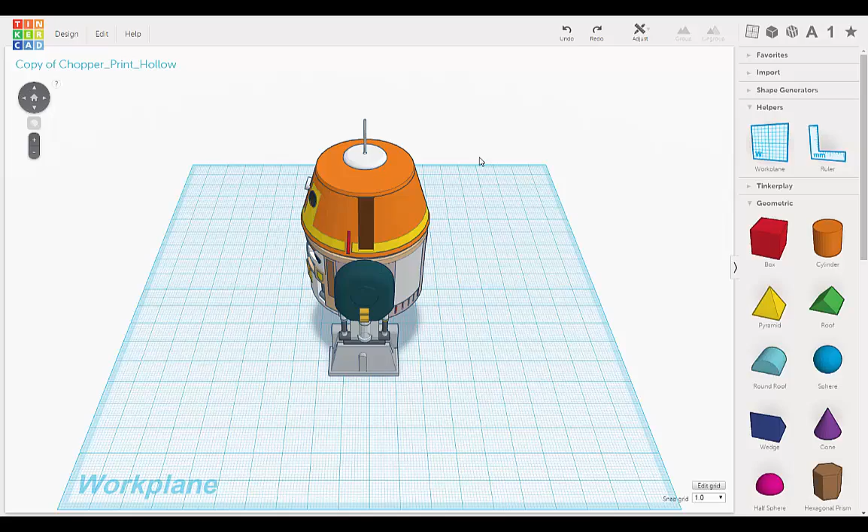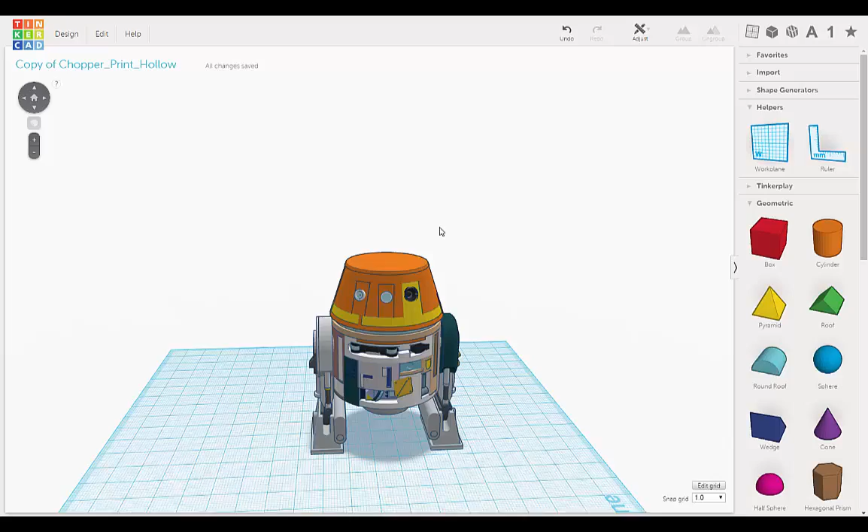First thing I'm going to do is remove this, because sandstone printing will not be able to tolerate something as skinny as this top part, this antenna. So I'm going to delete it. I have it saved in another file, and we'll only print this out. The sandstone wouldn't print that, it would automatically fail. So I'm just going to save that out without it, and maybe eventually when the colored plastics come through, we'll try it with that.

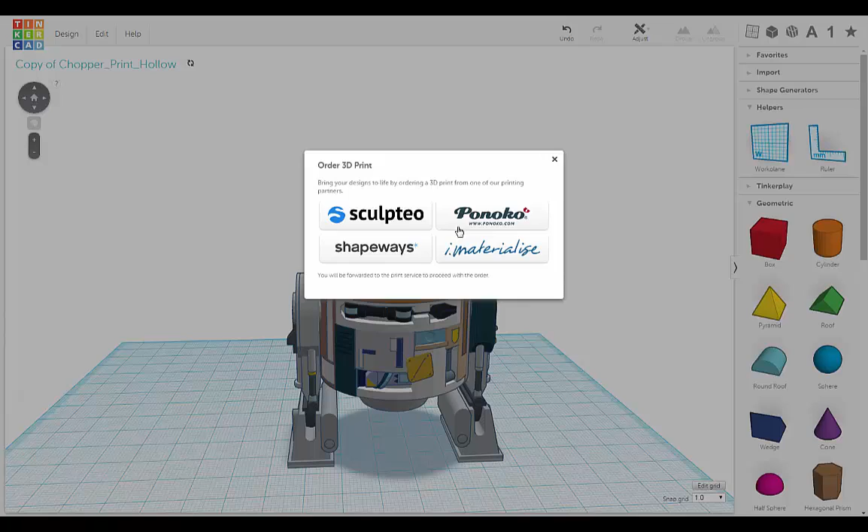So now that I have this ready, I'm going to go to Design and order 3D print. We're going to go to Shapeways, and I'm going to print in color. Continue printing, and it'll open up in Shapeways. And there it is, that came over really fast.

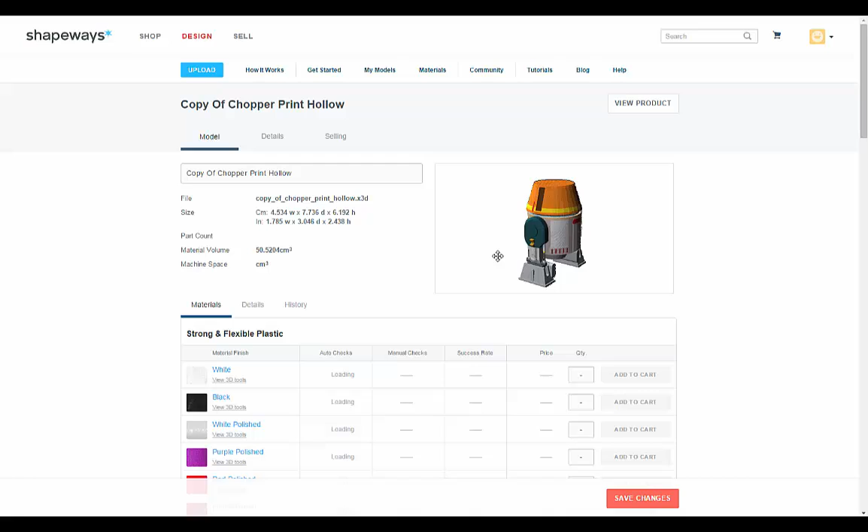Looks great in the preview. Now we just have to wait for it to do the auto checks.

So it looks like it's just a little shy of... it's about 2 inches wide on the side, about 3 inches high, and about 2.5 inches wide in the front. That's pretty good size, it could be bigger, but we're trying to keep our costs down.

So let's see what it comes up with. Okay, so we have issues. Let's scroll down to full color sandstone and let's see what the problems are.

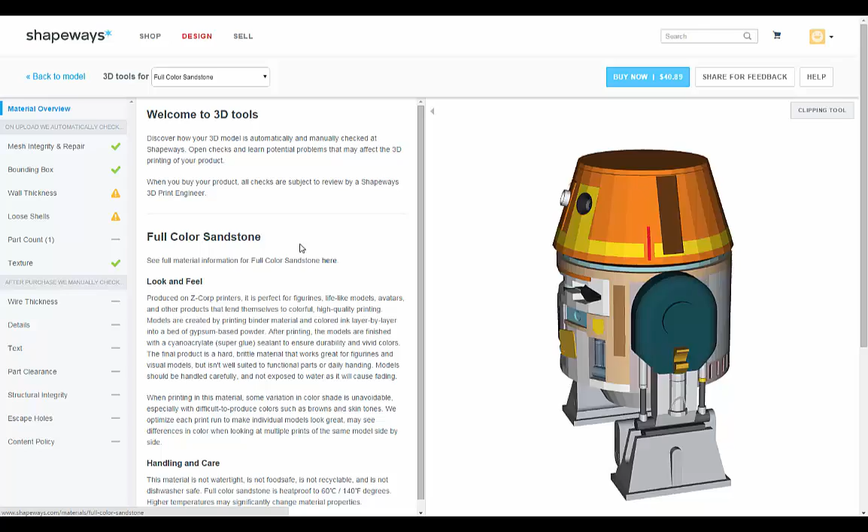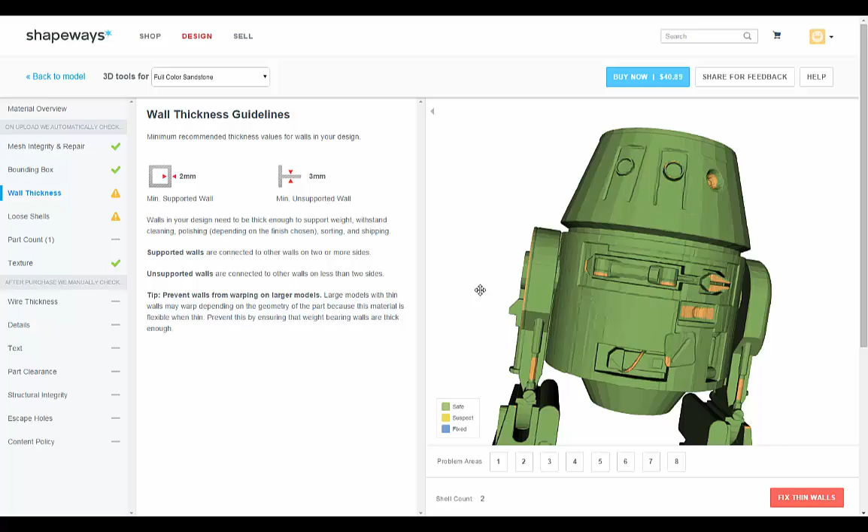Okay, so wall thickness, I was expecting that, and loose shells. Let's click on wall thickness. And if you look at the legend down here in the corner, green means safe, yellow means suspect, and blue means fixed. We're not going to fix anything in here, but it numbers them so you can click on it and it'll take you to it.

But we can kind of see. So this little panel here on his shoulder is probably a little too thin. This panel on the side here is just too thin. It's a little too thin up here, and this panel's a little thin.

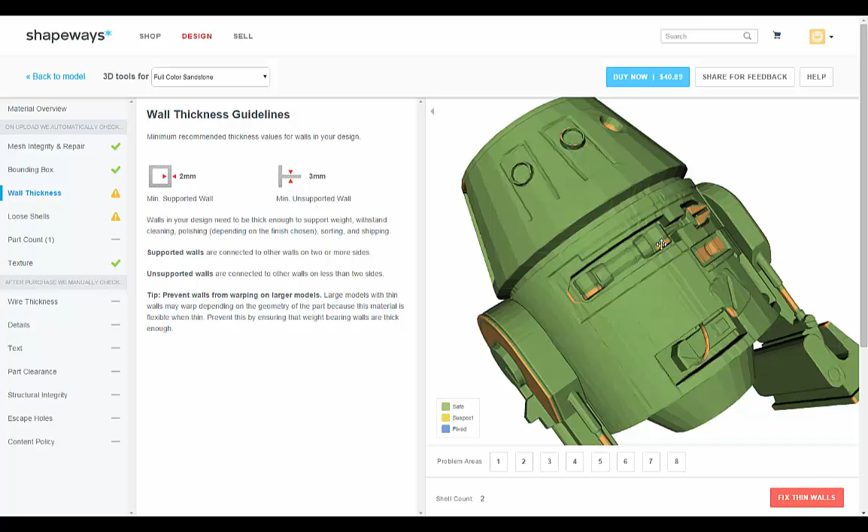This one I was expecting right here, this part's just a little too thin. The wire's just a little too thin. This part here is a little thin. This is a little thin, and then these here, the struts.

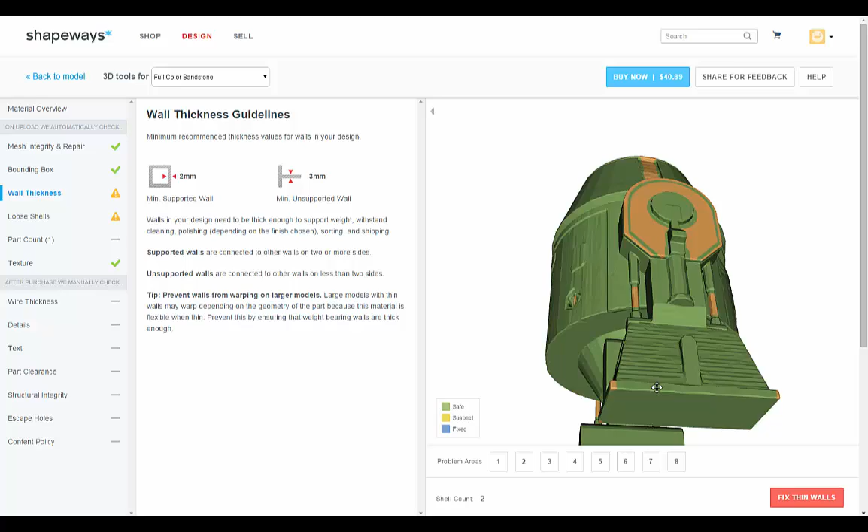So it has issue with this part right here, which is not bad. These are actually not too bad, these are all pretty doable. The corners here is kind of weird. I almost wonder if we just thicken this up a little bit, would that take care of that?

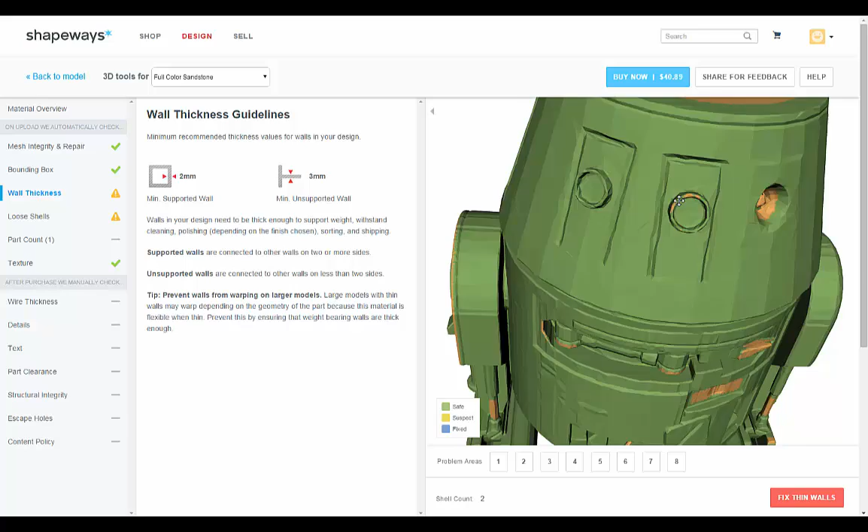But that's all pretty doable. This part I'm not sure why it's doing that, but we can figure something out there. Actually, these came out pretty good too, I was expecting this to have an issue. We might be able to thicken those very easily. In general, this is all relatively simple stuff, relatively easy to fix. So, not bad.

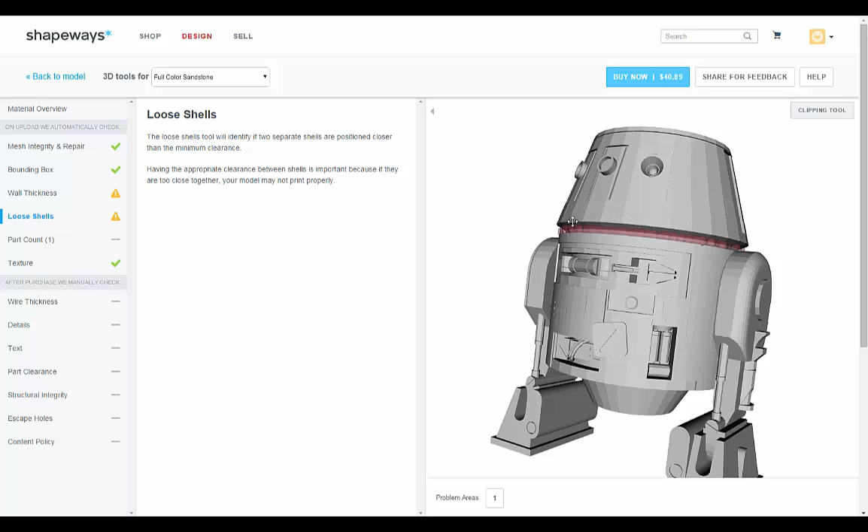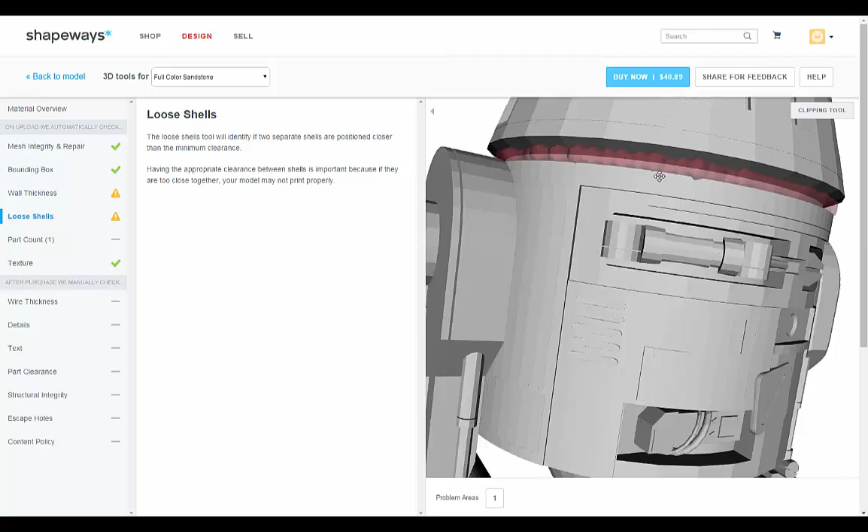So let's check out the loose shells. So this one, yeah, it's thinking this is two separate pieces, and I'm not sure why it's doing that, but we might be able to fix it if we take the head and move it down a little bit. It might be that there's too much of a space in there, so we can give that a shot.

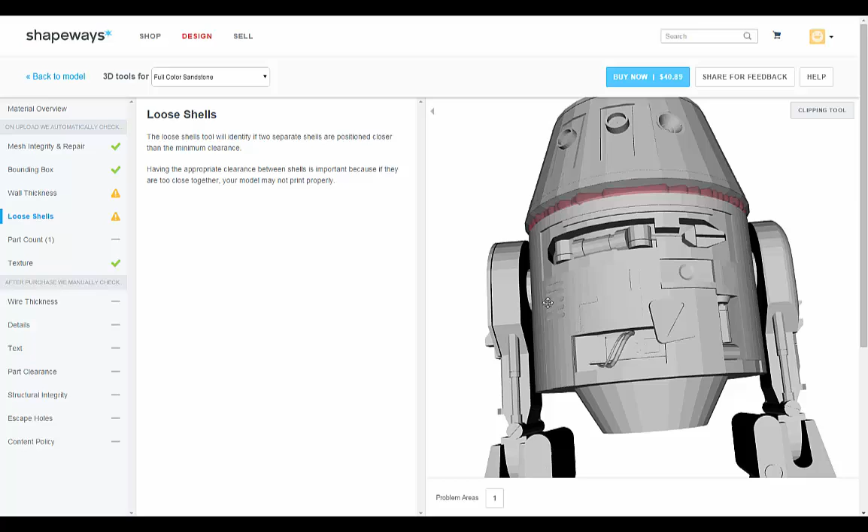Yeah, so let's try that. But overall, it's not too bad, this all looks like nothing major. So we can remember which has what issues, let's keep this up here, and we'll go back to the model, and we'll click out of that.

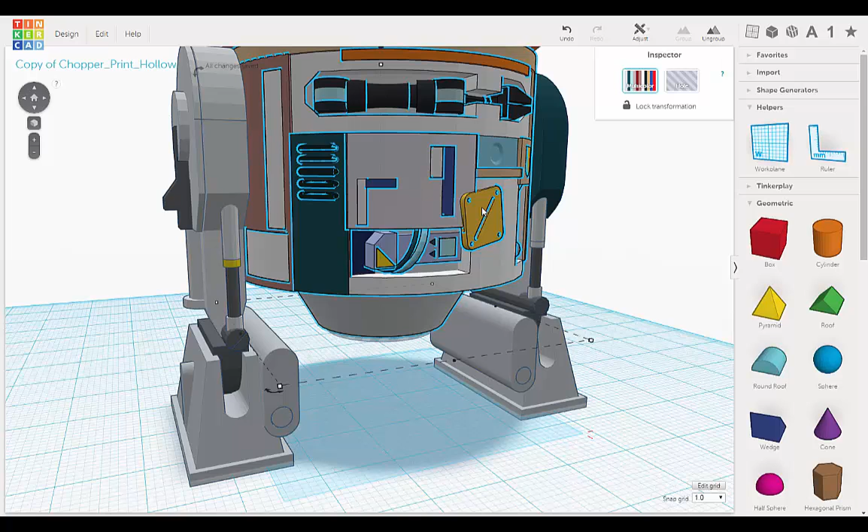So let's hit the simple stuff first. So this one here, first we have to ungroup. So it can figure itself out. Oh, we have to ungroup again. Okay, wow, and ungroup again.

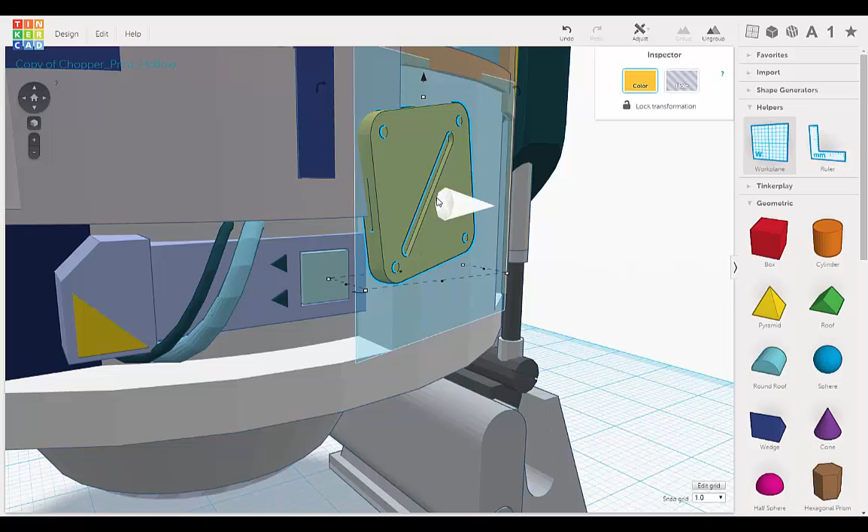There we go. Alright, this one should be just a matter of making it thicker. So here's a little trick: you grab the workplane tool, and we put it right there. We select this, and it moves this little button here onto the top, and we can just pull that out. It's probably too much, so let's take this to 0.25.

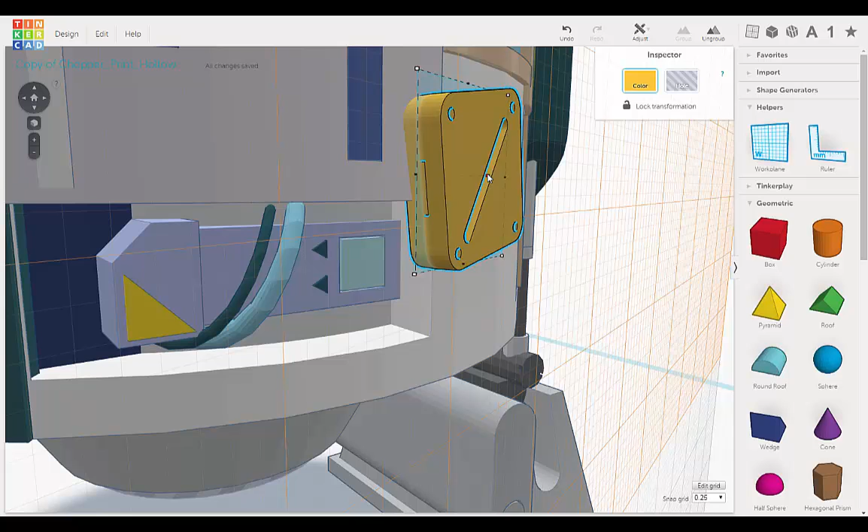Oh, that's really thick. Let's try and just put it back a little bit, and then what we can do is we can thicken this side by getting underneath it.

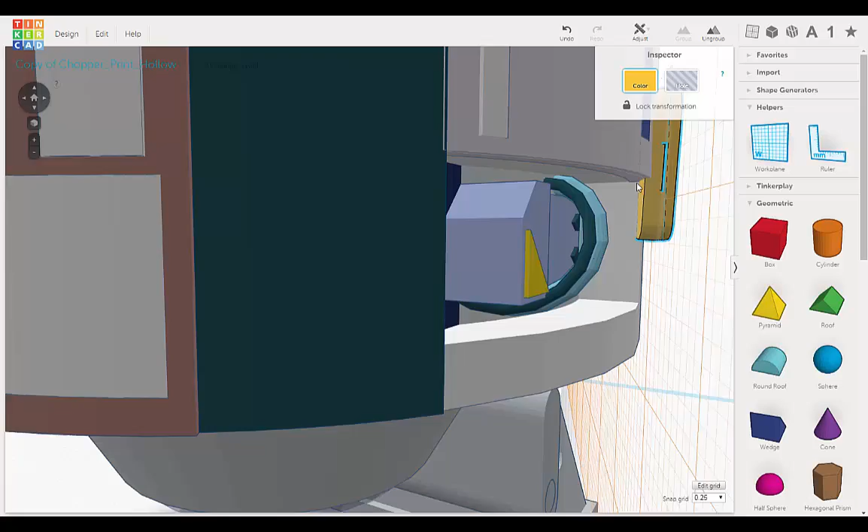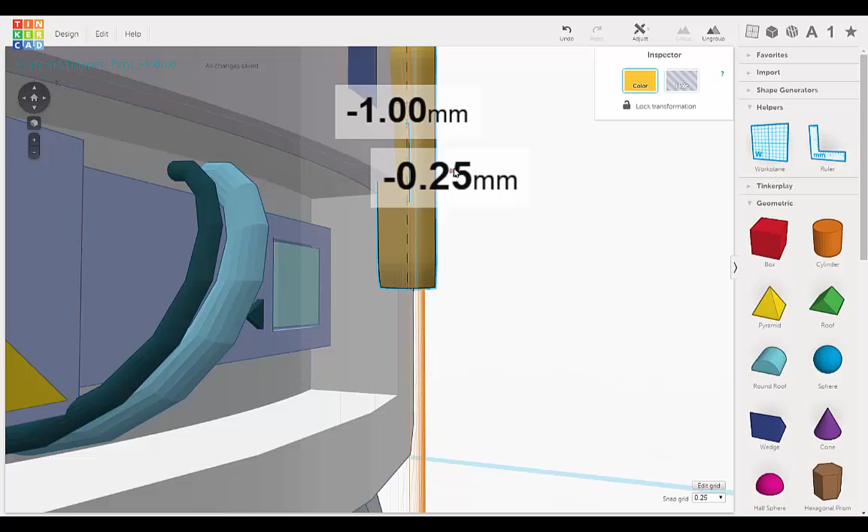Actually, I'll do it this way. Pull this out again, and then let's grab it and just push it down. There we go. And let's just do it a little more. There, that should solve that problem.

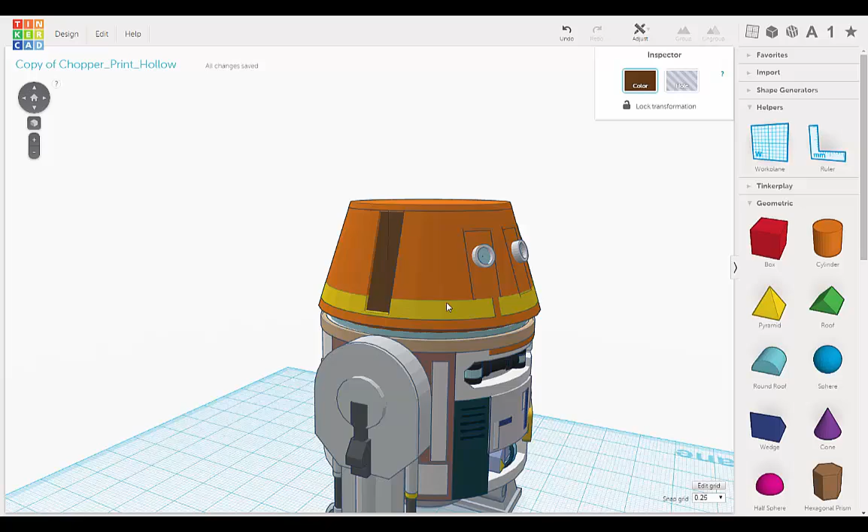Okay, now move the work plane back to normal. All right, these panels here, let's do the same thing. So let's move that there. Okay.

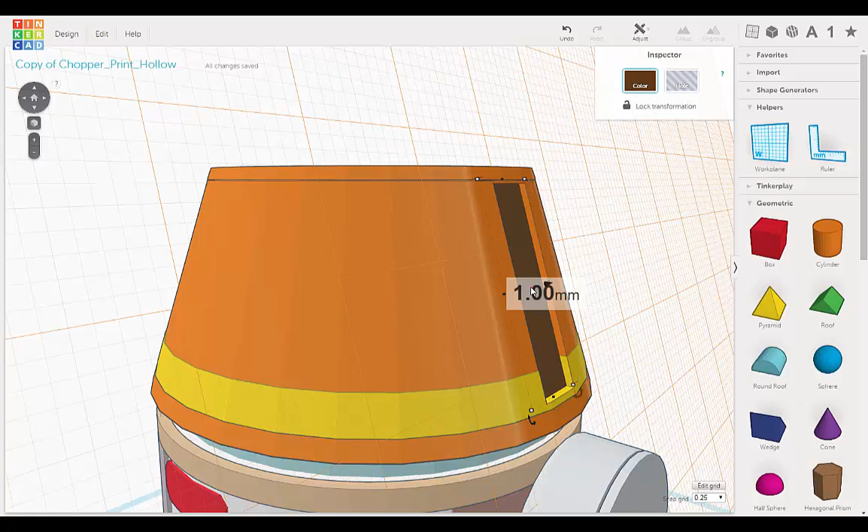Select it, and let's pull this out, and then push it back in. There, so that made that 1 millimeter thick. That should be good enough for that.

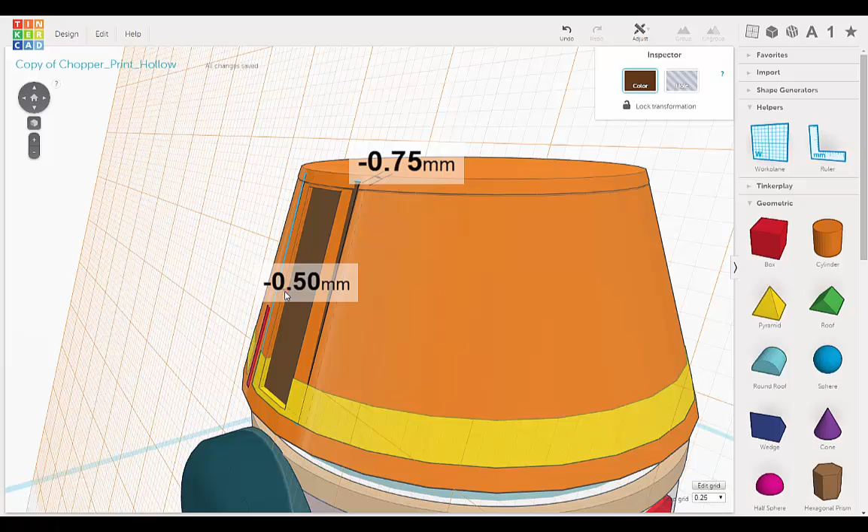We'll do the same with this one. And let's move the work plane over there. Yeah, it's only 0.25, that's way too thin. So it's 1. There we go. Does that match up with that? Yep, great.

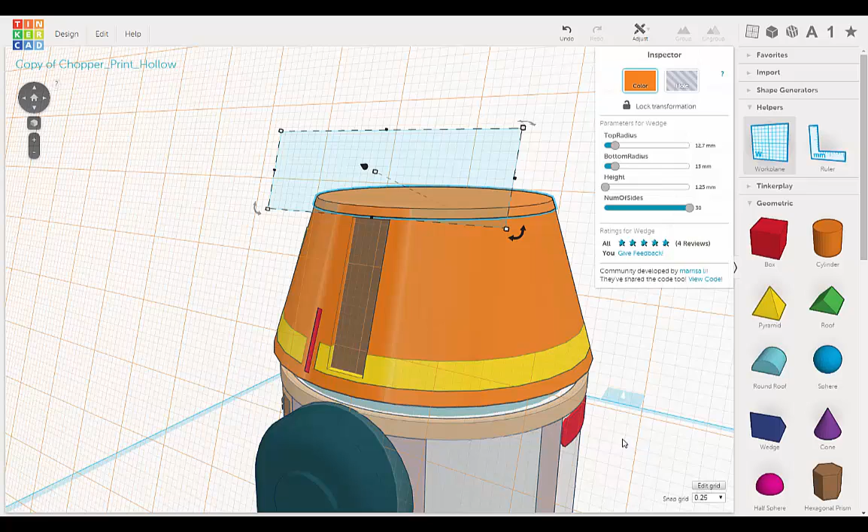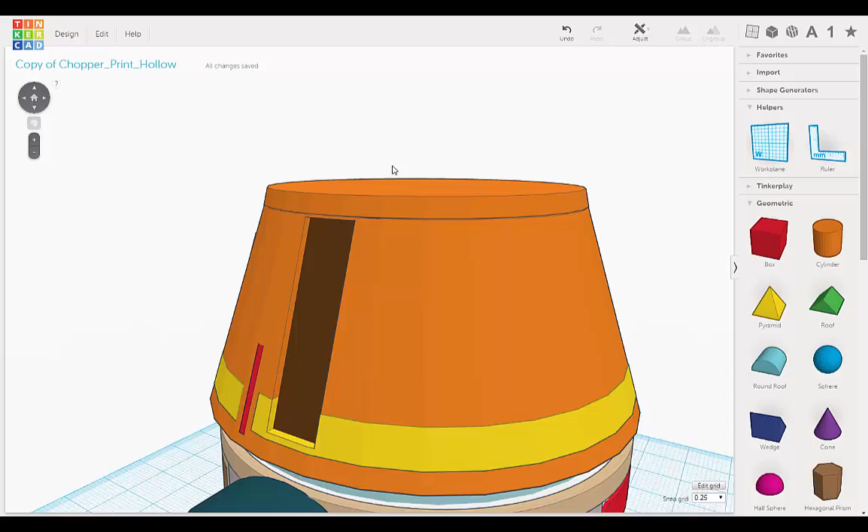Okay, and then let's try this piece here. Let's move the work plane back down to the bottom. All right, this piece is 1.25, so let's just move that. Oops. There we go. All right.

Unfortunately, sometimes that's what you have to do when you're going to make something physically, is you have to make some slight little changes. So, all right, now we'll thicken this piece as well.

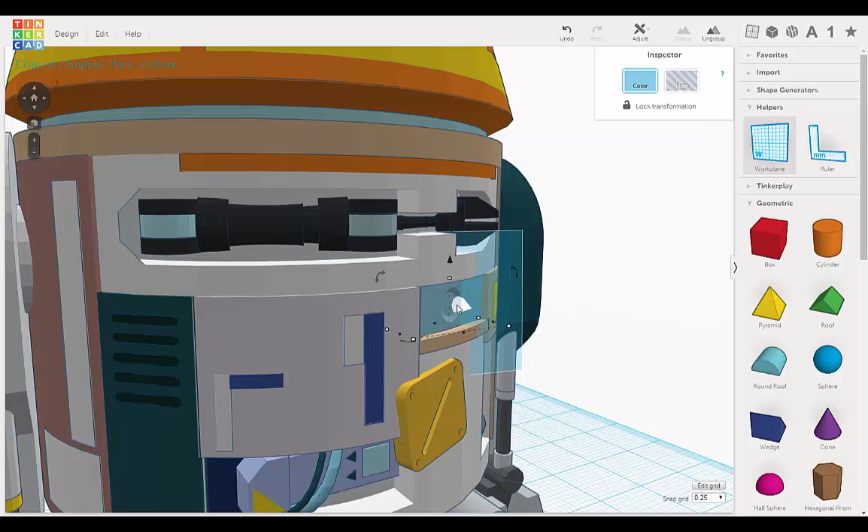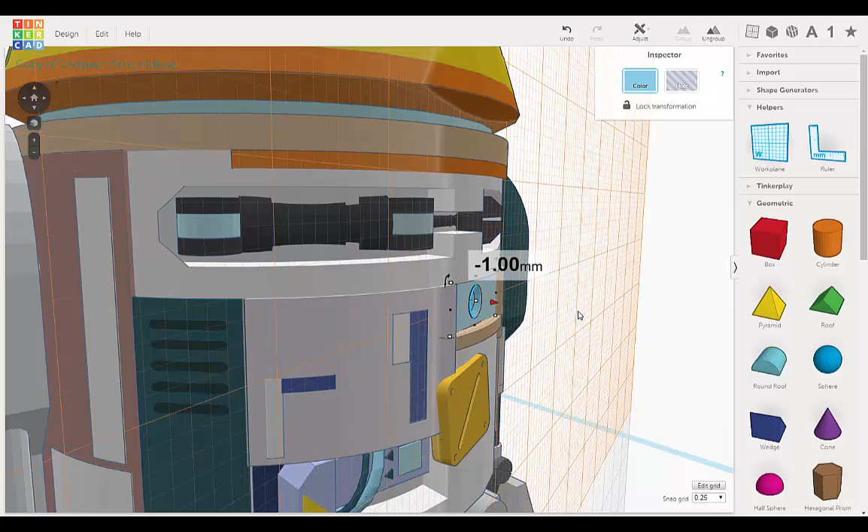Let's drag the work plane over. That didn't go the way I wanted it. Let's do it again. There we go, we select that panel, make it 1 millimeter, and then let's just push it back in. Select it just to double check. Okay, 1 millimeter.

All right, that worked. And then let's move this back and let's select this piece. Now, the nice thing about this, we have these controls here. So let's make them 3.

And 3. All right. Do the same with this one, 3 and 3.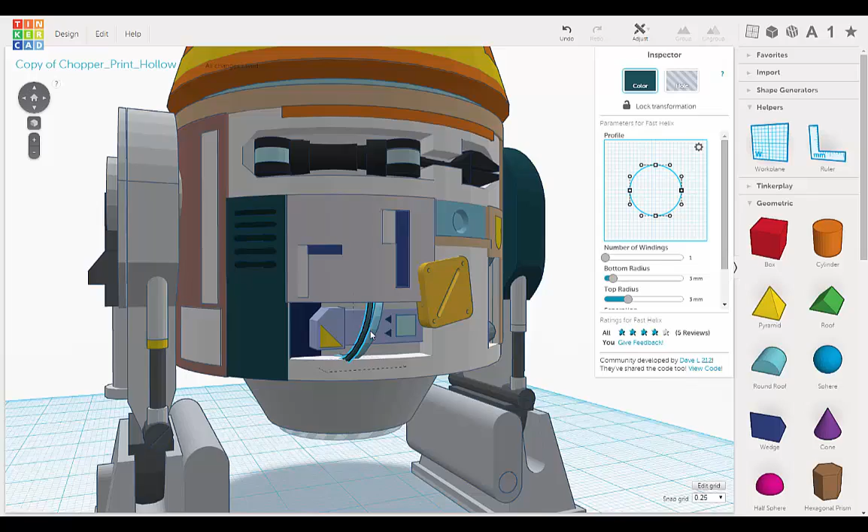And we just have to make some adjustments here. So we'll just pull this up, and then we'll just slide it in.

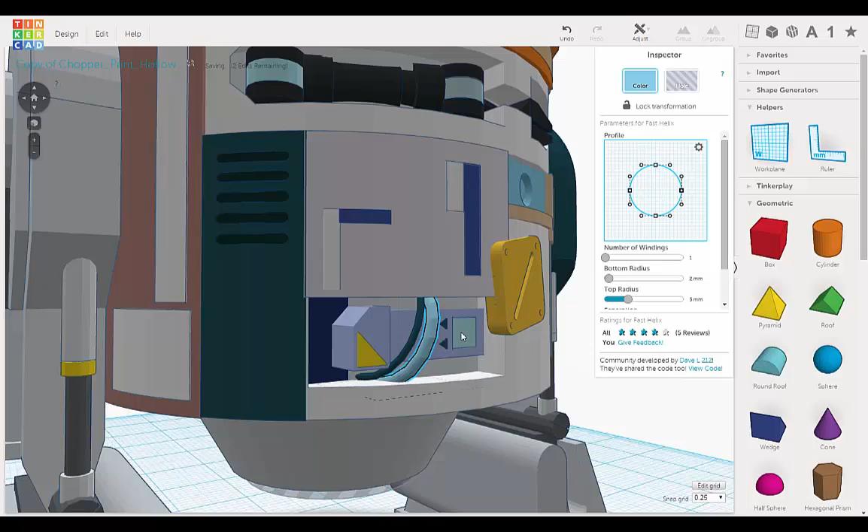That works, now I'll do the same with this one. Slide it in. And we'll just move it a little bit up. There we go, I'll slide in just a little more. I'll do the same with the other one. It just gives it more support.

Okay, oh, that still seems skinny though. It's 3 and 3. So this one, 2 and 3. Let's do 3 again.

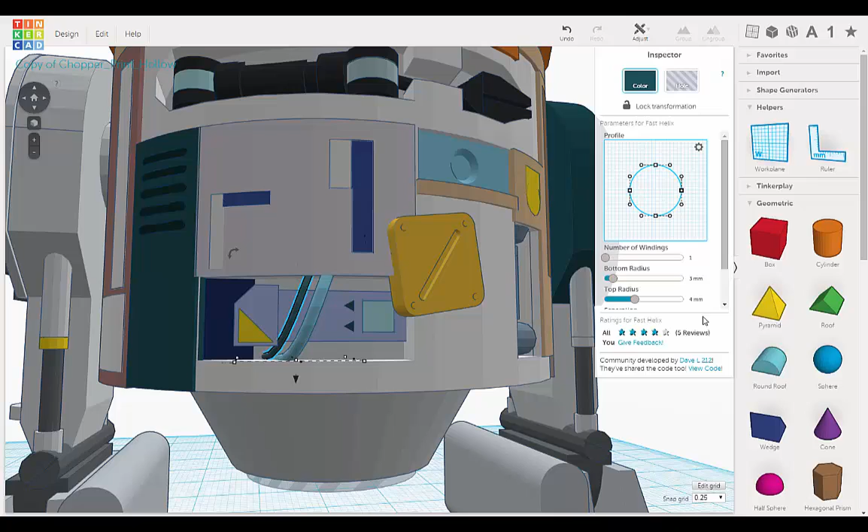Huh, I'm gonna make this one thicker. Let's go to 4. Whoa. Does not like them to be the same. Oh, maybe I need to make it smaller.

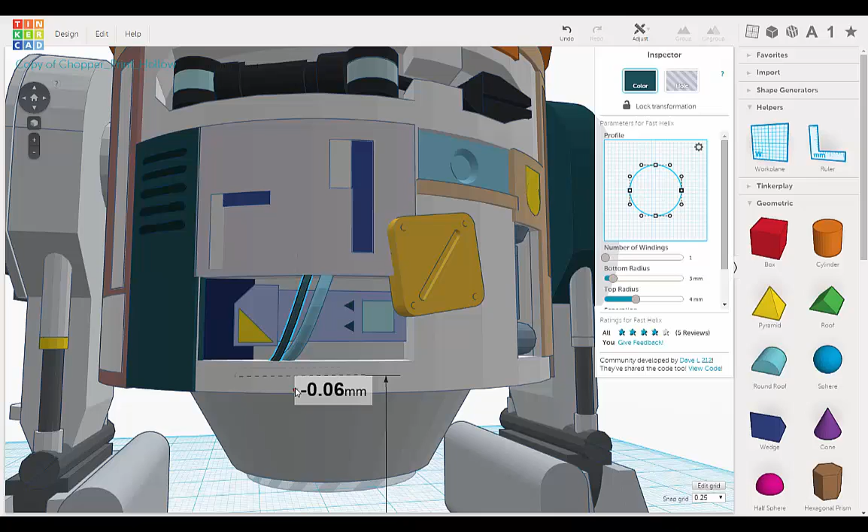Let's try 2. Huh. Okay. I'm moving them closer too, so they'll kind of support each other.

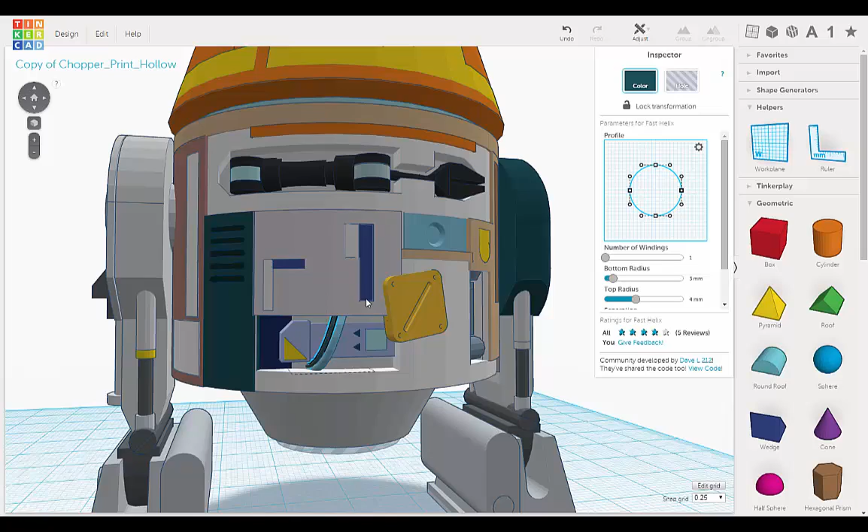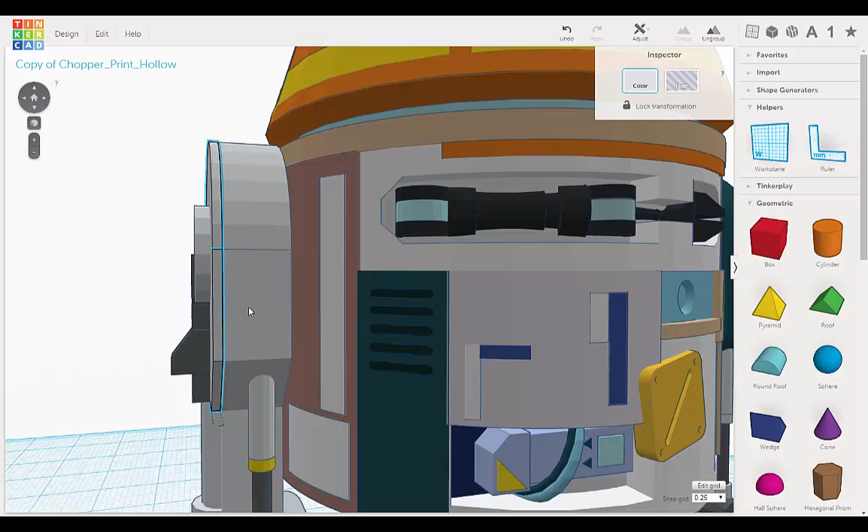Okay, now this piece here needs to be thicker, so we're going to ungroup that. And select that piece. And let's pull that out. Okay, that's better, that should work.

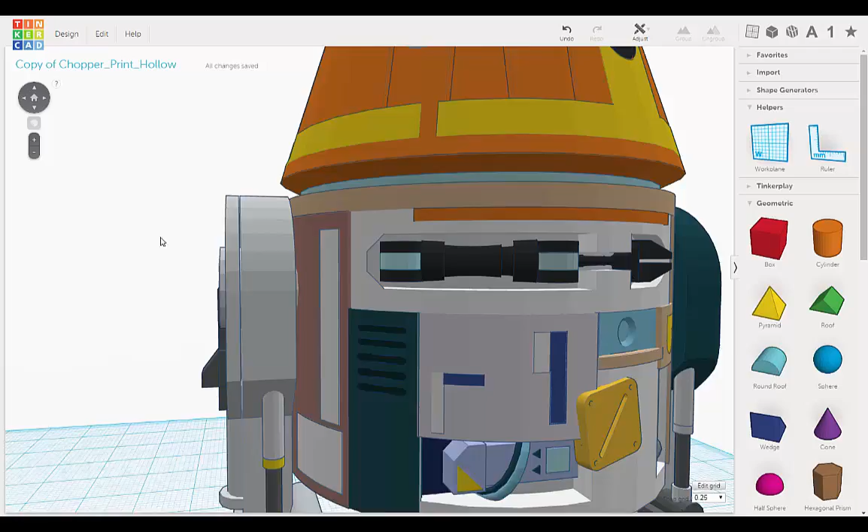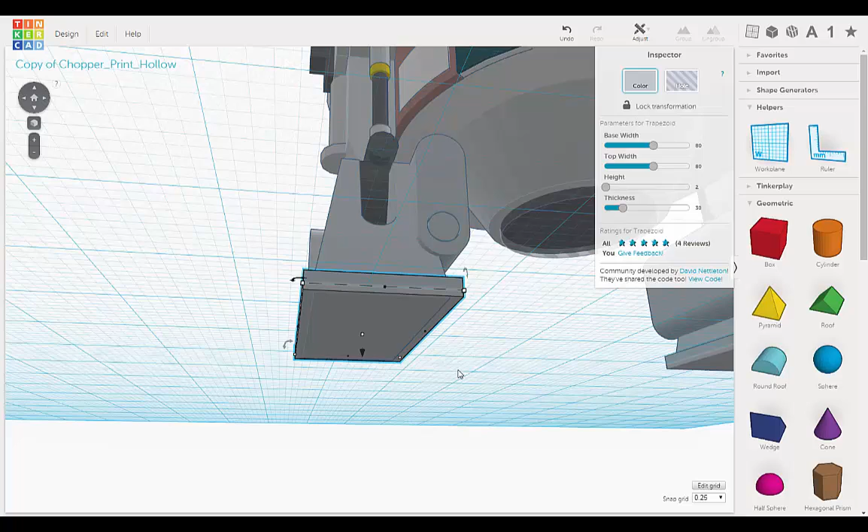All right, and I'm going to select the feet, and I'm going to thicken them as well. So I'm going to ungroup that. Let's see, so that is 1.61. Let's do them both at the same time. So I'm going to ungroup that. It's the way we make sure they're the same.

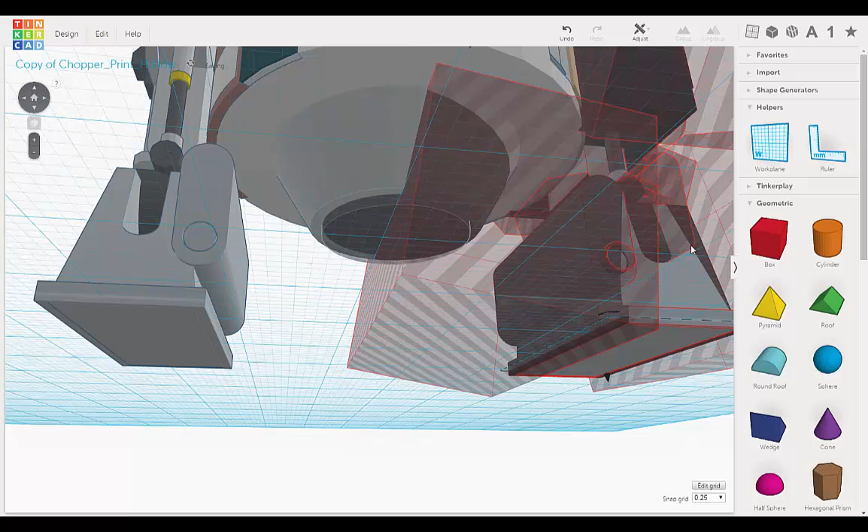All right, whoa, not quite, this one's still. All right, ungroup again. Ungroup again. Ungroup again, there's a lot of groups. Ungroup again.

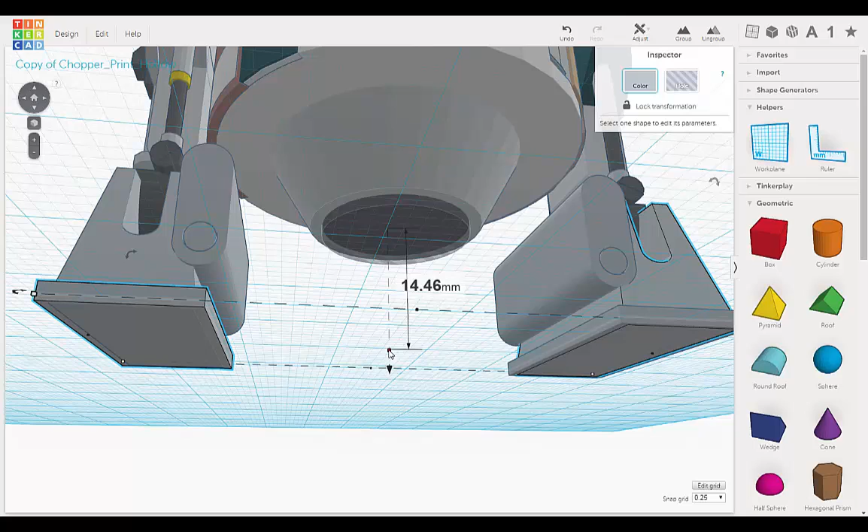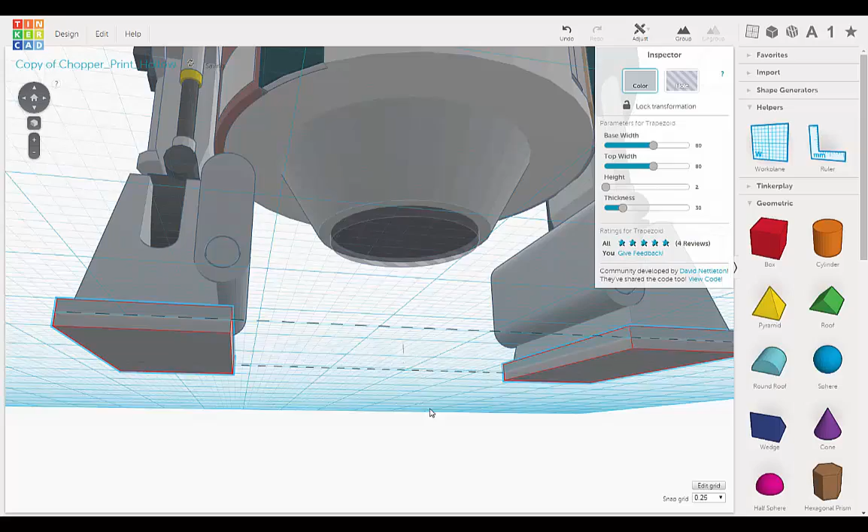Okay, so let's just shift select both of them. And whoa, is that still? That's still grouped. No, it's not, okay, I just selected the wrong thing. My bad, okay, and let's just. All right, that should be better. Okay.

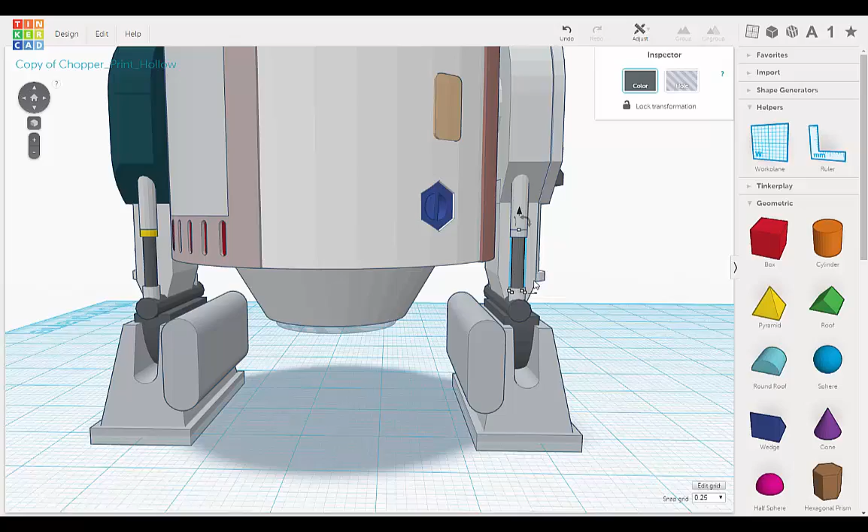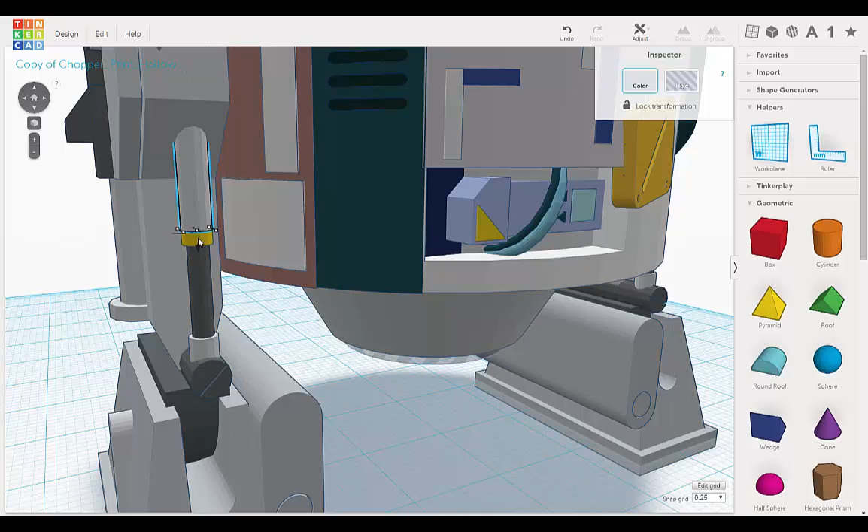And now these parts here. So this is when I wish we had a cylinder, that advanced cylinder, that you could just type it in and just change it. That would have made it easier. Okay. So we will get to thickening these rods in the next video.